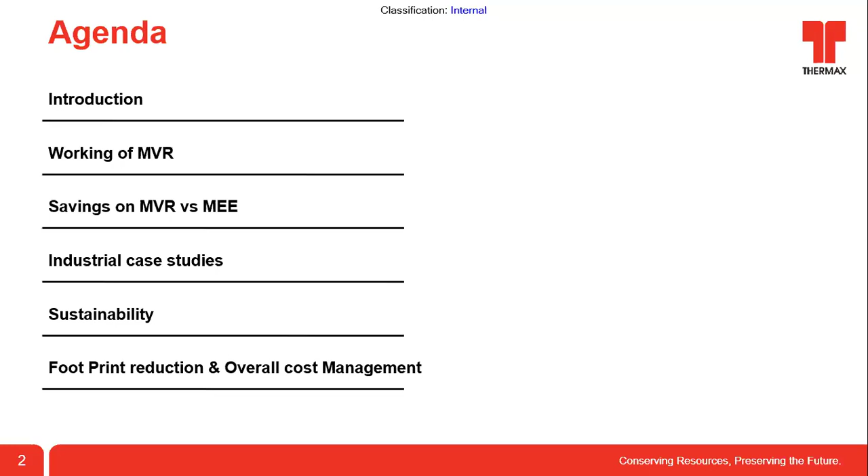So this is a brief about Thermax. Thermax is an Indian company, started in 1966. We are based out in Pune, our HO is based out in Pune. We have 14 manufacturing locations across the world, 10 of which are in India - 2 in Pune, 1 in Solapur, 1 in Chennai, 1 in Gujarat, so 10 locations put together. That is the manufacturing strength we have as Thermax. We have presence in 30 countries across the globe, with 6,000 people working for Thermax. Last year we crossed the 10,000 crore mark, which is why we have mentioned 1.1 billion in revenue. So as a turnover, we have crossed the 10,000 mark last year. So this is a brief about the company.

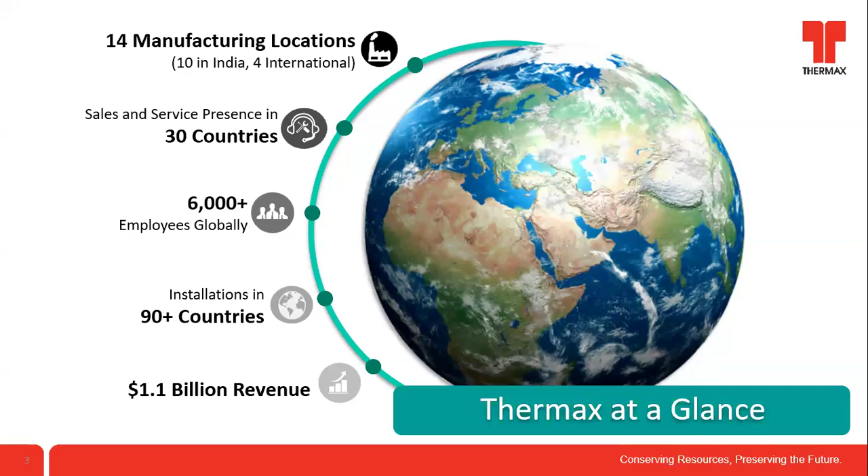Coming to what we do for industry, any industry will have utility requirements, starting from heating solutions, raw water treatment, cooling, power requirement, and chemicals. Whatever utility requirement is needed for an industry, Thermax is able to cater to that need. And whatever waste comes out of an industry, like effluent, we are there in that business also - we do wastewater treatment business, we do air pollution control equipment business also. Whatever flue gas comes from a boiler needs to be purified before letting it out to the chimney, so we do that too. So this is what Thermax as a company serves to the industry. Except DG set and air compressor, Thermax can solve all the problems for an industry on utility requirements.

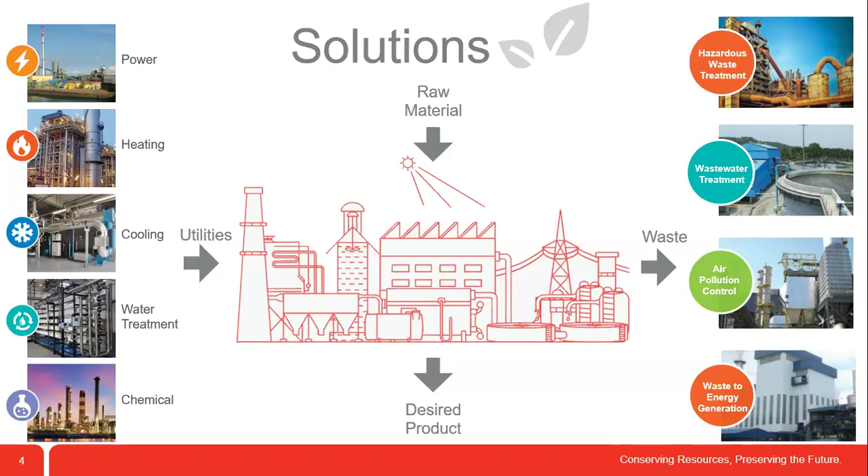Now coming to today's topic of zero liquid discharge, I will just brief about what this is, and then get into the MVR portion of it. Any industry generating industrial waste needs an ETP, then the ETP followed by an effluent recycling system, and then ZLD. In ZLD, conventionally we have multiple effect evaporators, which is the most power consuming, most energy consuming process in an ETP. In place of multiple effect evaporators, we have a solution called MVR - mechanical vapor recompression - which can be 40% lower energy consuming than the conventional MEE. And the salt which can also be recovered from MVR can be reused as a resource. For example, in the textile industry, we get salt that can be reused in the process again for their dyeing application.

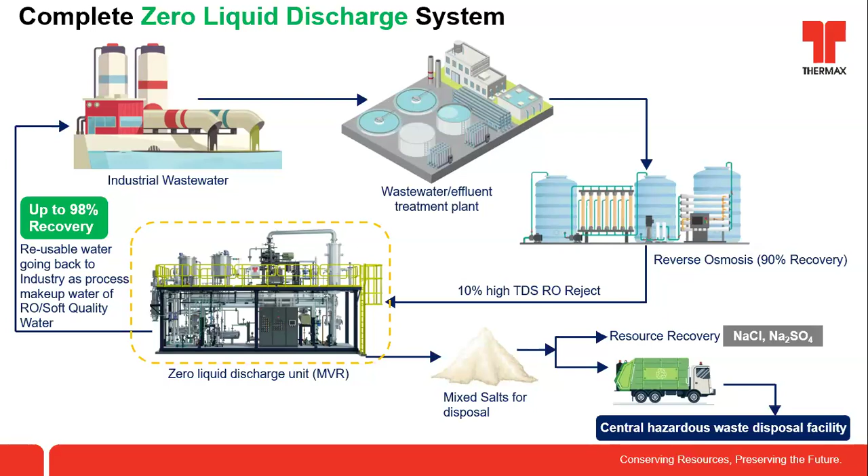So this is specific to MVR. As I mentioned, the energy savings will be 40% compared to the conventional MEE. I have a detailed calculation on that which I will show in the later slides. Because of this, the operating cost of the ZLD system comes down drastically. Also, if you go for a green solution like electrical based MVR, there is no requirement for a separate boiler, so CO2 emissions can also be brought down. Based on the experience we have in Thermax and the R&D we do with effluent water, we can give a tailor-made solution for any kind of effluent. This is also an IoT enabled system where we can monitor and operate it from a remote location. Coming to footprint, this requires comparatively less footprint than the multiple effect evaporator.

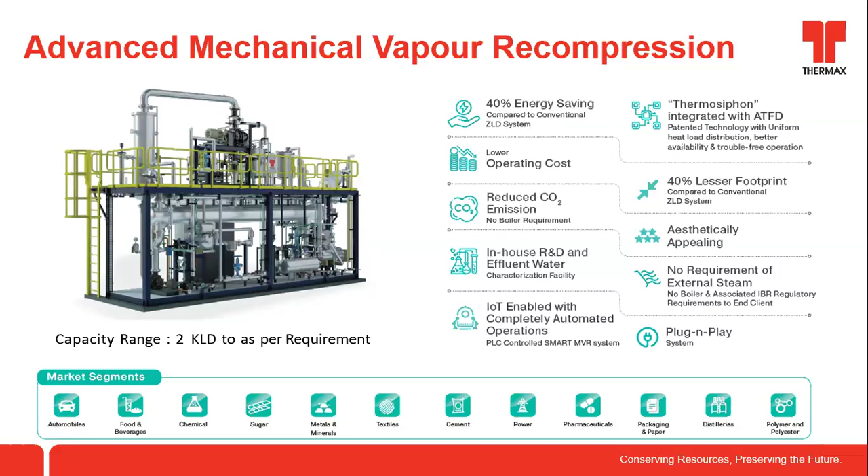These are the market segments where we have supplied our MVR, starting from automobile, food and beverage, chemical, pharmaceutical, paper, distillery. So we have supplied to all major industries where there is a need for a ZLD system. Now I will get into the working of the MVR.

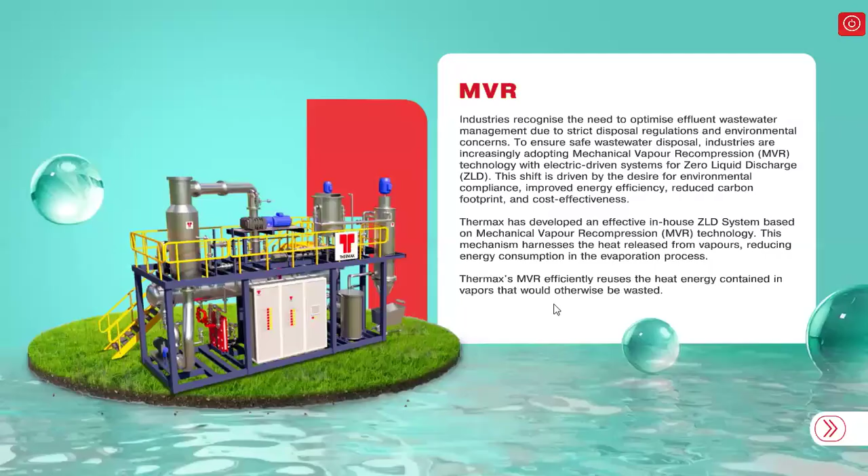I will just share an animation which will... I have reshared my screen. Hope this is visible to you.

Yes sir, it's visible. So this is the typical MVR system which we manufacture at our factory. I will just show you the process behind this.

I will just start with the feed. Typically the MVR feed is the RO reject water. So the effluent goes to an RO plant, and the RO reject which is coming from the RO plant will be taken to this MVR feed tank.

From this MVR feed tank, we are pumping with the help of a pump to the preheater. We have a preheater installed in the MVR. We are pumping it to the preheater, and from the preheater it goes to the flash vessel. The flash vessel is like a liquid vapor separator, which we also have in the evaporator.

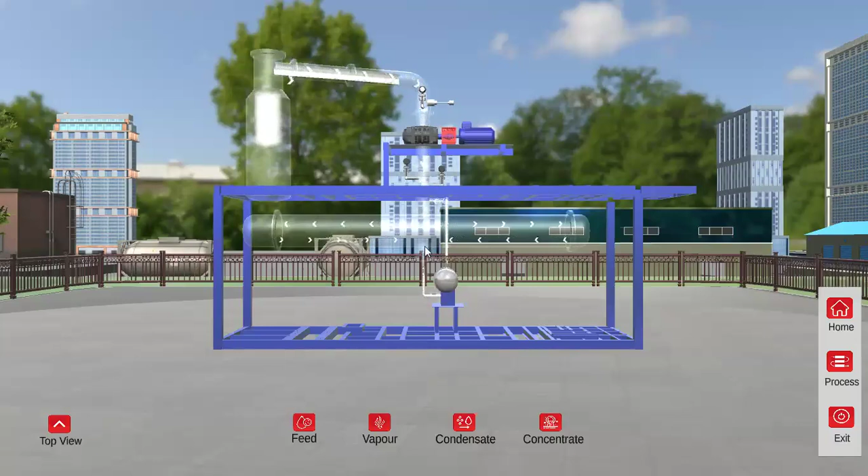So, bottom, so you are moving it from the bottom of the calandria, am I right? Yes sir, condensate from the bottom of the calandria. Yes sir. Okay, thank you.

We are taking the condensate from the bottom of the calandria and we are putting it to the heat exchanger. Again, the condensate will have some temperature, like 65, 70 degrees. So on that heat we have to reutilize.

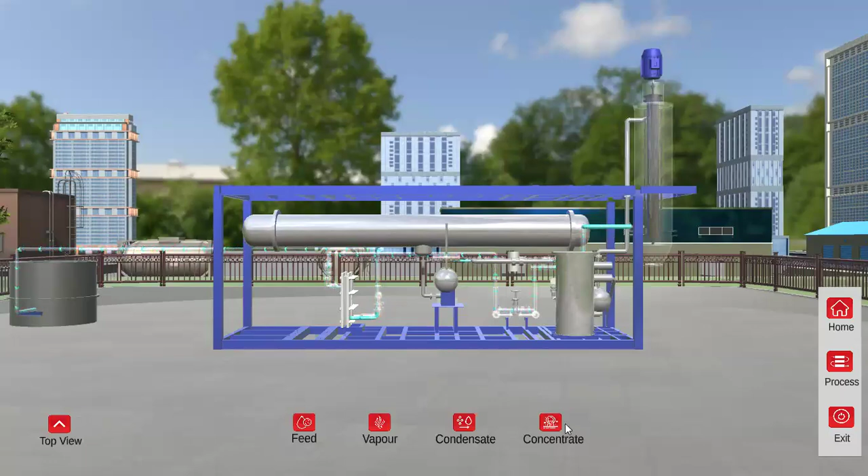And so coming to the concentrate part, whatever concentration we are getting from the vapor liquid separator, we are taking it to a balance tank. From this tank, we will be pumping this liquid to an ATFD, agitated thin film dryer.

On the outside jacket, we will be giving energy like steam or electricity. We will be giving steam as a source for this, and we will be scraping the concentrate inside the jacket. There will be a scraper mechanism inside, you can able to see that thing. So there will be a scraper mechanism which will be scraping the liquid on the surface of the inside jacket. So this picks up the heat and becomes solid here.

So typically with this MVR, we can able to recover 95% of the water, which can be reused for whatever process application we have. The remaining 5% will be as moisture, it will be in the salt. So the salt will typically have like 5 to 10% moisture. That is the thing we can able to do in an MVR.

So this is the setup where we have MVR plus ATFD in combination.

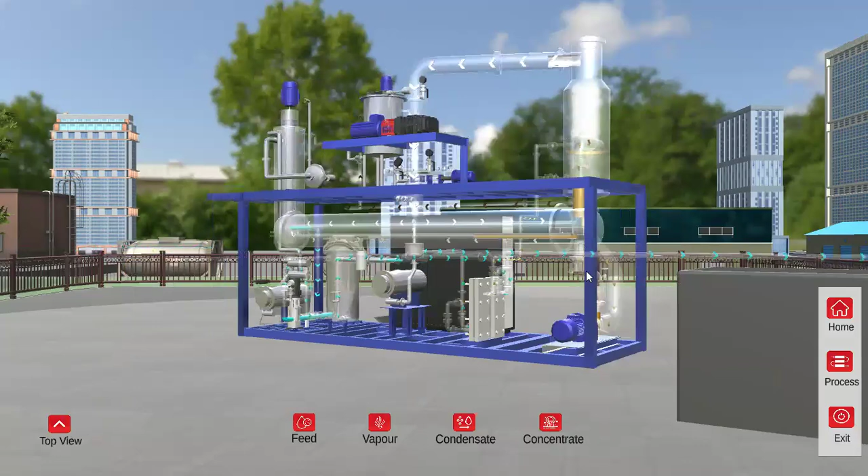But you haven't shown any vacuum pumps here. That's why, no, vacuum pump is there. Vacuum pump is part of the equipment only, that is there, that will be there. This is not shown in the animation, but the vacuum pump will be part of this.

The nitric acid, you are using for cleaning? Yes sir, yes sir. Yes sir, same nitric acid which you use for ME, we can use it here also.

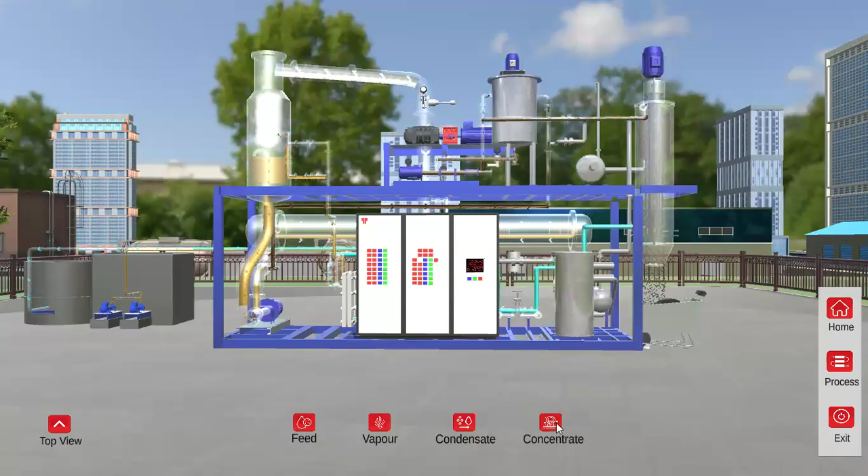Yeah, ma'am. So once we start taking the vapors out from the vapor liquid separator, the effluent gets concentrated at the bottom of this flash vessel. So this effluent, we take a loop out and give it to this balance tank, which we can call the balance tank or ATFD feed tank. From here, we have a pump which will pump the liquid to the ATFD.

ATFD is agitated thin film dryer. Typically it has a jacketed design. On the outside jacket, we give external energy like steam. Internally, we have a scraper mechanism which will scrape the solids off the surface of the jacket. Once it picks up the heat, vapors are generated on top and the salts get deposited at the bottom of the ATFD.

Hello, sir. Hello. Hello. Yeah, what is the MOC of the pressure tube and the blower?

Sir, pressure tube and blower MOC actually depends on the effluent characteristics which will be there. Typically it will be SS316L, titanium kind of thing. Inside the blower MOC also, it will be SS316, SS316L kind of thing.

SS316L. Yes, sir. Okay. In case we are from the pharmaceutical industry and have some quantity of solvents in our effluent, if solvent is there, is this plant suitable?

If solvents are there, it is suitable, sir. We have to check the level of solvents present, and we need to see that. If we have a report, we can study it and come back to you, sir.

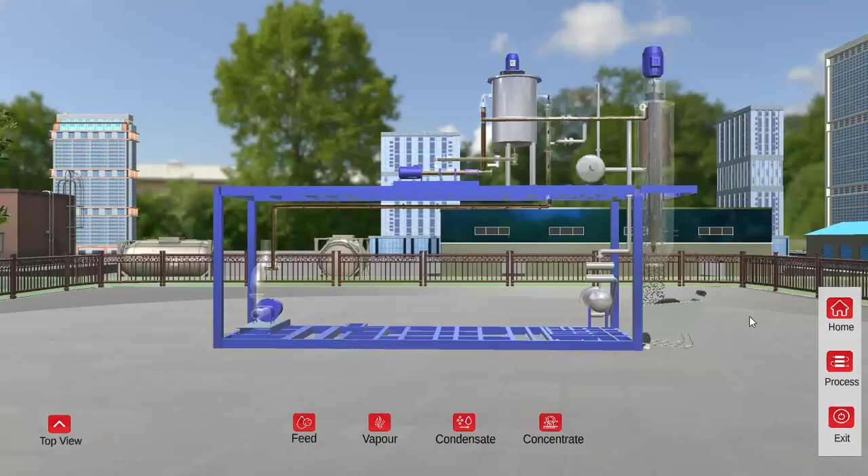Sir, is it possible to do jet pump cleaning in case of heavy scaling? Jet pump cleaning, actually I need to check, sir. Because if it is the calandria, if it is in vertical position, we can do the jet pump cleaning. Even though we are using anti-scale and CIP cleaning, in the evaporator over a particular concentration and time, scaling is unavoidable.

Okay sir, so even the jet pump cleaning facility is also available, that means it is very well equipped. I will just check. Sir, can I move to the presentation, sir?

Sir, hello sir. Yes, sir. Sir, regarding this ME and MVR difference, suppose in an ME triple effect evaporator, if I am drying 1 KL, it is evaporating within 2 hours. Is there any time saving also in this, or only energy saving?

So there will not be any time saving. See, typically the system is designed, for example if it is 10 KLD, it will evaporate 500 liters per hour, so it will evaporate 10 KL of water in a day. Similar to ME, the evaporation rate will remain the same because we are designing for that. If it is a 10 KLD ME, it is equal to a 10 KLD MVR, so there will not be any time saving in this.

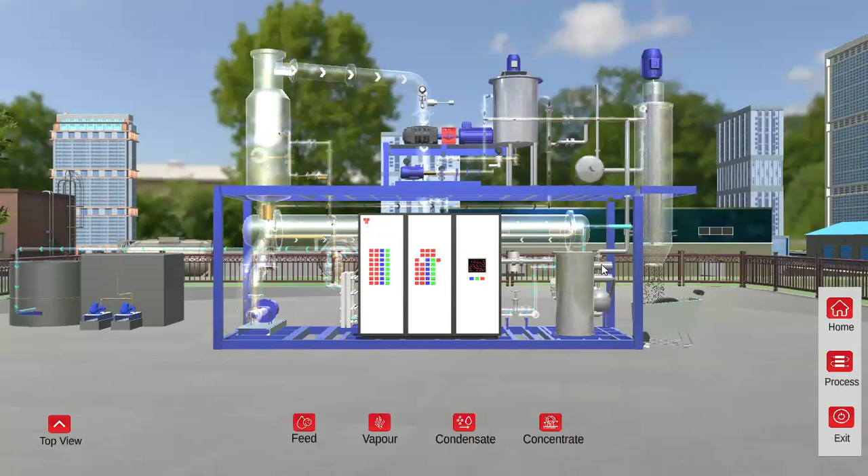Naveen, is it possible to run the MVR without ATFD? In this schematic, you mentioned ATFD, right? So without ATFD, is it possible to run? Yeah, we can do that, sir. So ATFD again...

If indeed, I have taken your question like we will be running an evaporator for 6 days, but ATFD will be running for 2 days. Whether we can run separately, I have taken the question like that. That's what I told, that we can run the system. It means we have to withdraw the concentration directly from the calandria, right? Yes, sir, yes.

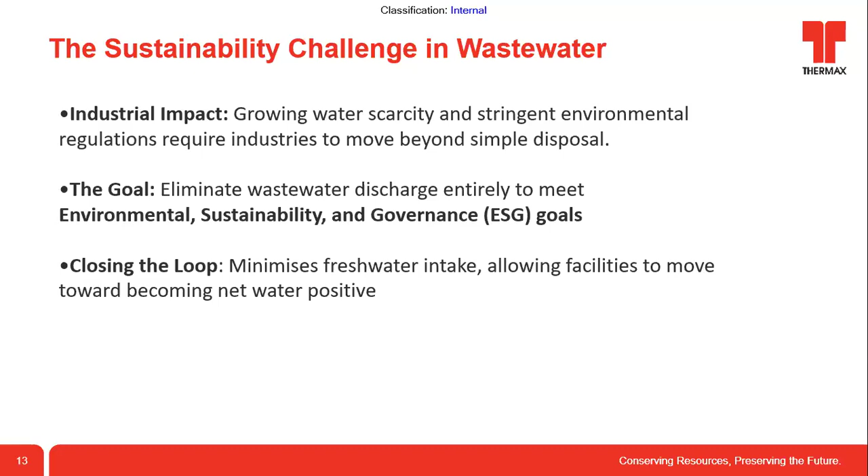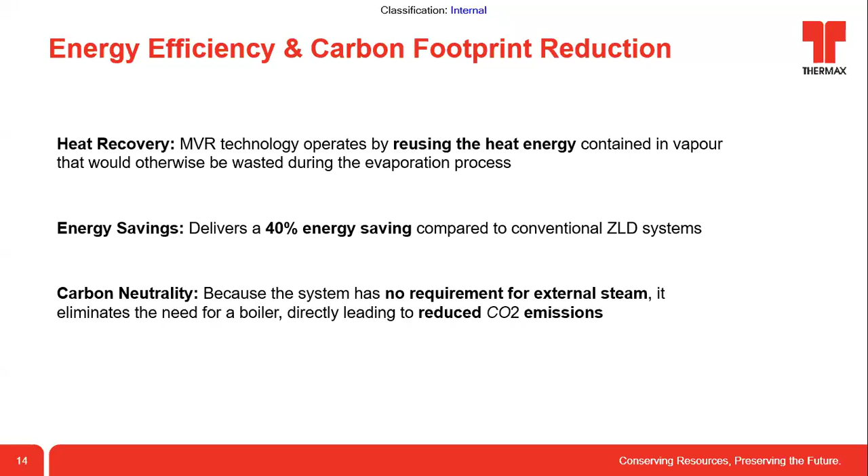Then 40% energy savings compared to the conventional systems which you have seen. Then carbon neutrality - we can reduce the external steam requirement. If you can give the steam from a green source, or you can give electricity from solar or wind, then it is green energy, renewable energy, so the CO2 emissions can be reduced with the help of this.

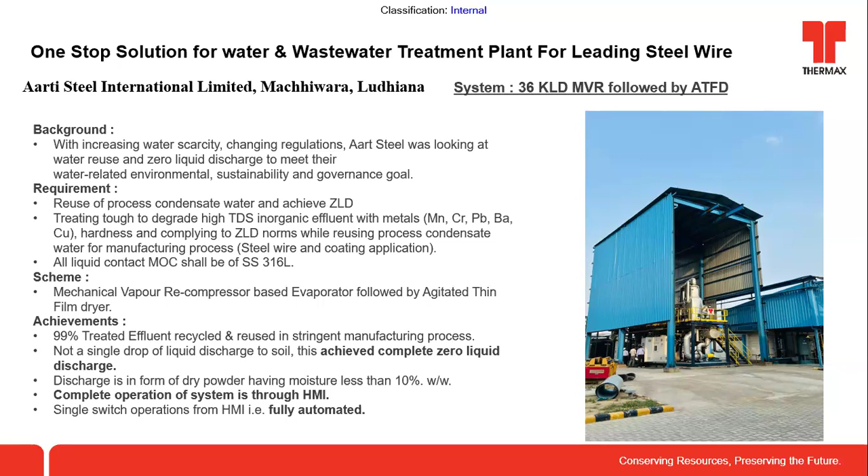So the second one is Aequs. Aequs is doing PCB and semiconductor kind of industry, which is in Karnataka. There we have a 26 KLD MVR installed, which has been running for the last 2 years now. We are recovering 95% of water from the effluent, and the TDS is less than 100. They are retreating it in their RO and ultra pure water system, and using it in their process itself.

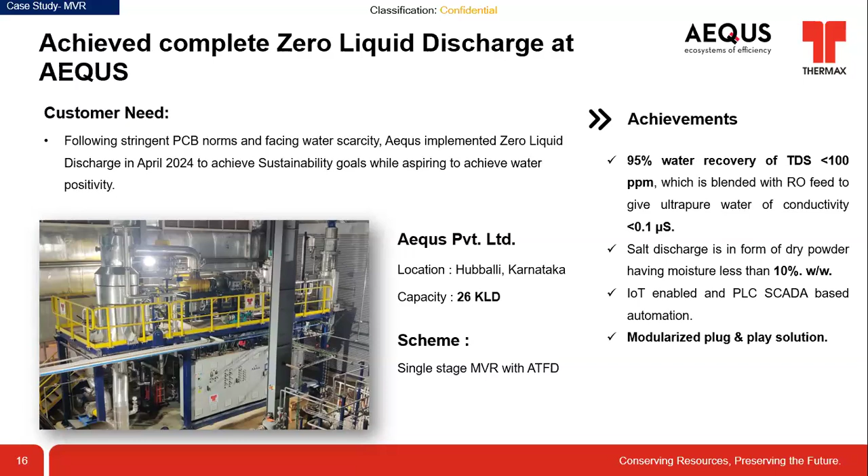This is some of the photographs of our installation, sir. You can see the size of the unit, which is very compact, which is skid mounted. Whereas if you go for maybe a 26 KLD ME, you can imagine the space which is required - we would have to build like a 4-story building, and we would have to invest a lot in civil work for that. So instead of that, this will be a skid mounted system, sir.

So this is PLC based or how is it working, sir? It is PLC based. This is a completely automatic plant, PLC based only.

Okay, this is the ATFD system. This is the complete MVR. This portion is the blower, sir.

Coming to this blower part, I just wanted to tell you, today there are a lot of blowers, but in our project we use only 2 makes of blowers. One is from Piller and the other is from Kaeser. Both are imported ones, most reliable ones. So we use only these types of blowers in the plant, and these blowers alone account for 50 to 60% of the overall MVR cost.

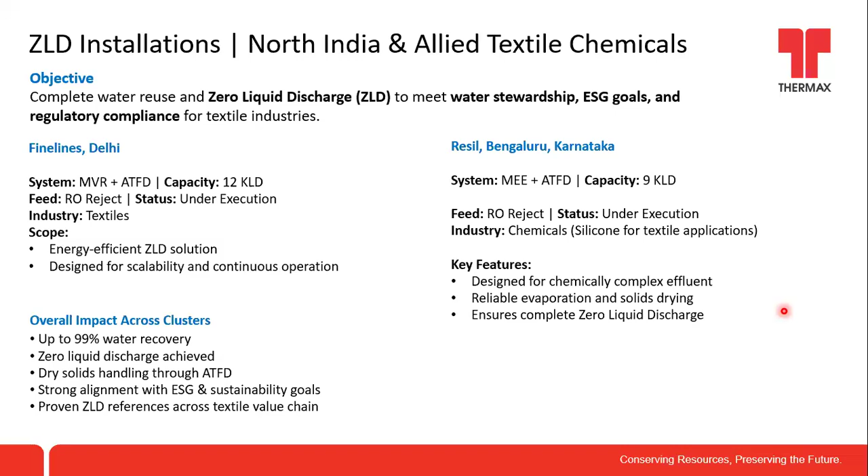This is one installation which we have in Chennai, in Samsung. This is an ME installation. Just to showcase that we can also do ME, I wanted to show this.

This is a 36 KLD plant with ATFD. This is in Samsung.

Why did they go to ME instead of MVR? Any specific reason? No, sir, this is quite an older installation, like 4 years back. They went with ME at that time.

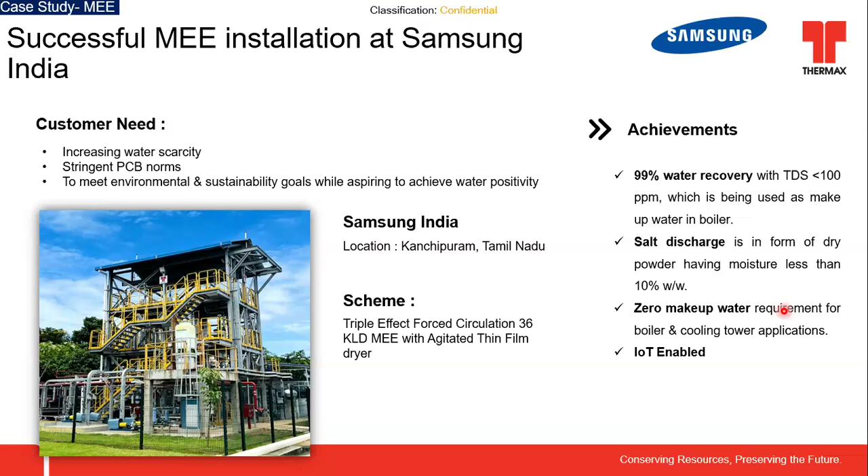Again, coming to the footprints, we have seen the sizes of the MVR. Typically it will be 40% less than the conventional ME, and the height of the building also will be less. On top of that, the civil cost required will also come down compared to an ME.

Any limitation to MVR? Any limitation where we cannot treat in MVR, for which ME is the only solution? No, sir, nothing like that. Whatever you are doing in ME, that can be done in MVR. We can do whatever ME can treat, that can be treated in MVR also. There is no limitation for that.

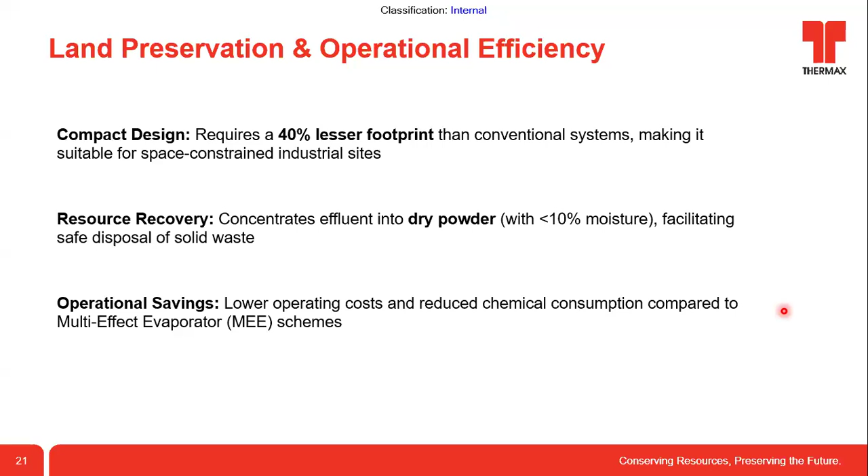Okay. So operating cost, operational savings we have discussed, we have seen that in the savings calculation also.

Again, this is a completely automated plant with IoT enabled. So if you wanted to view the parameters remotely from a different location, you can do that. Even it has inbuilt programming to give alerts if something goes wrong. So all this is there.

And then for ATFD, we have a thermosiphon principle where with this principle we can eliminate the steam requirement in ATFD also, so that is also there. This requires electrical energy for ATFD. And then this comes in a skid mounted system, so easy to install, and all these advantages are there in MVR compared to ME.

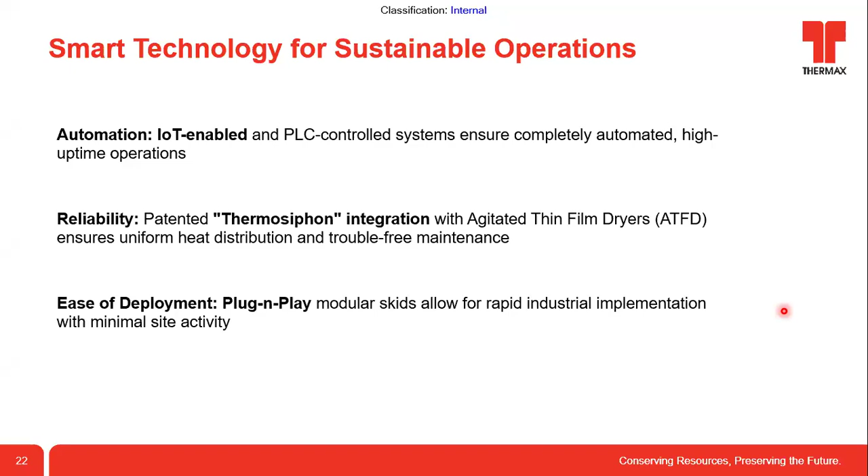So these are some of the photos, sir. This is a 13 KLD ME, I just kept the ME photos. This photo is from Madura Coats.

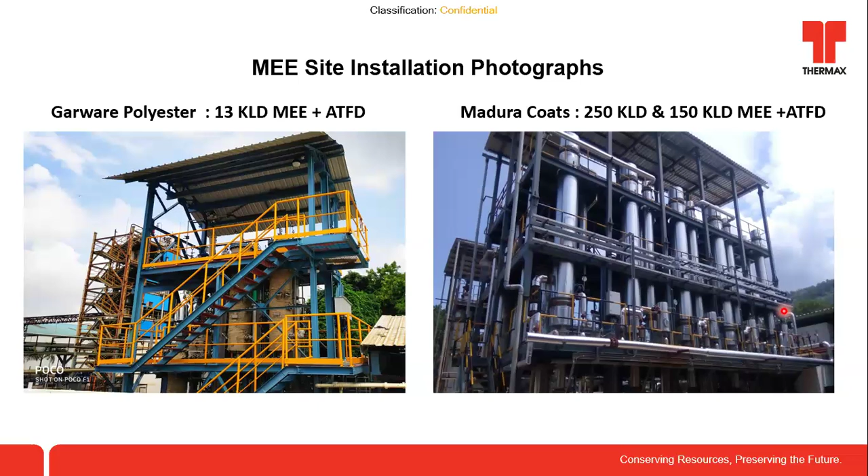Sir, this MVR can be usable only for ETP? Only for ETP, or are you talking about some other applications, sir, where you wanted to concentrate something? Yeah, exactly. See, we have a RO water treatment for our canteen facility.

Okay sir, so we are having 30 to 40% rejection. Yes sir, do you have any solution? See, again, RO reject - now what is the TDS there, and how are we using that water? The TDS is roughly around 600 to 700. Okay.

So the thing is that you can use it for cleaning and flushing applications. Yeah, already we are using it for that activity only. Yes, that is the best one which you can do, sir.

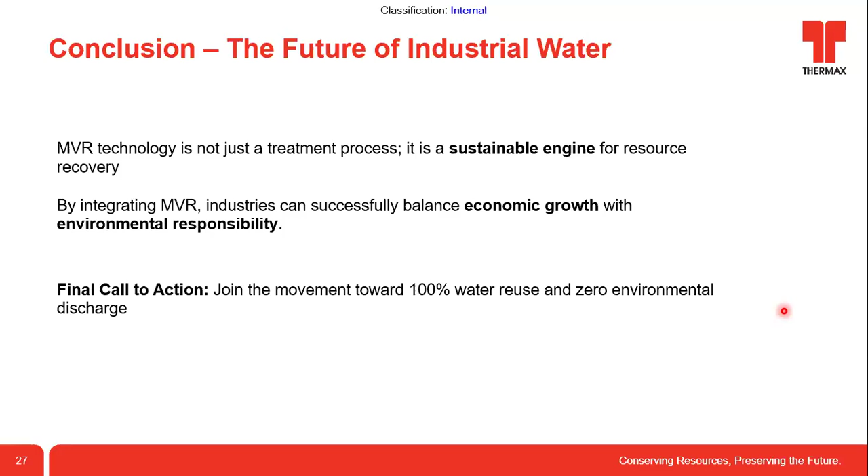See, recovery rate is same in both MVR and MEE. What is the benefit of using MVR? See, again, the energy consumption which is required for MVR will be less than MEE.

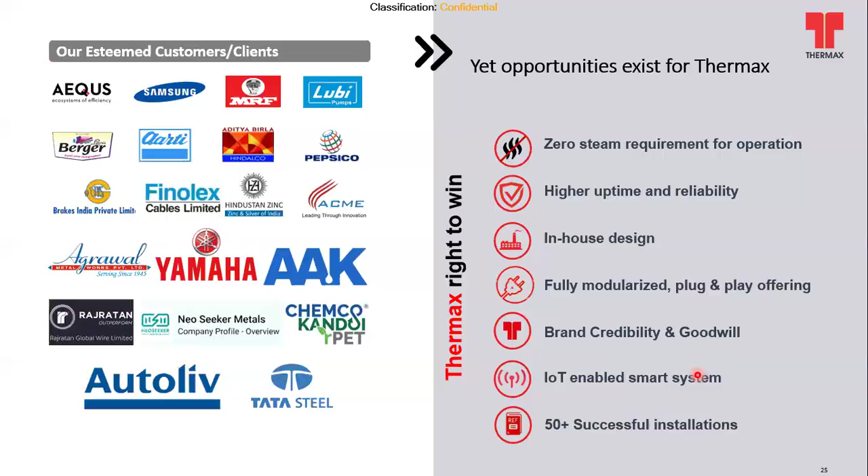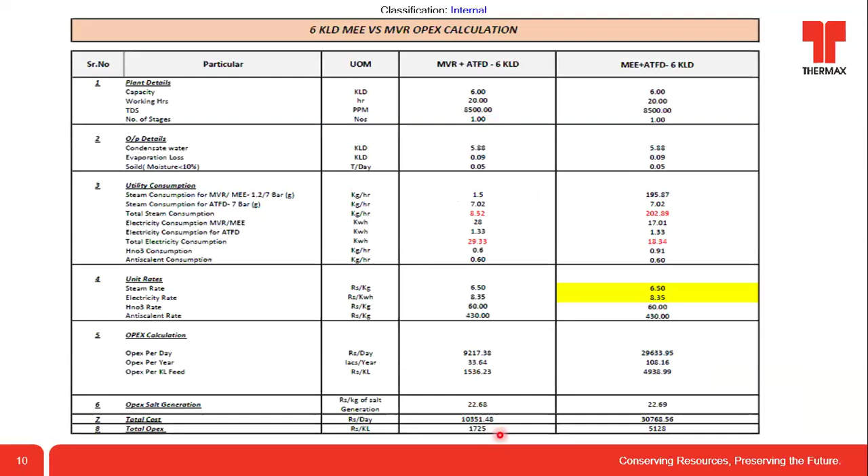So you can see this. Now if you see, for water with 8500 TDS, to evaporate we need 1700 rupees. Okay? Whereas for water with 63,000 TDS, in MVR we require only 390 rupees. So the cost of operation will come down if you increase the TDS. For that we need a pre-treatment, so we can able to plan a pre-treatment.